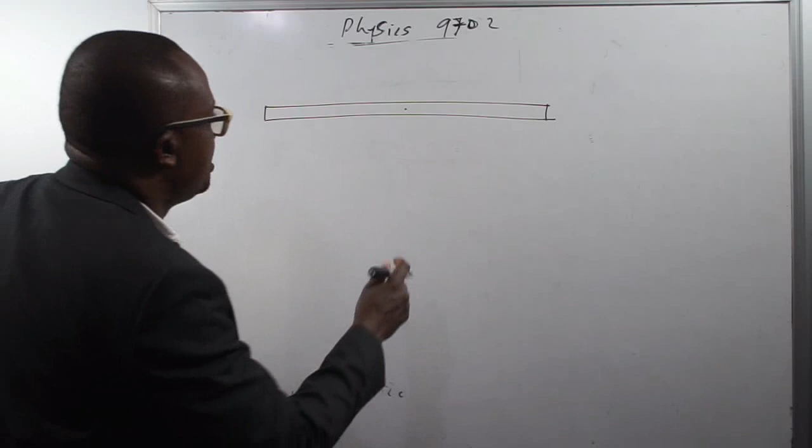So let's look at explanation on principle of moments. For example, let us say you have a uniform bar. A uniform bar means a regularly shaped bar. That implies that the center of gravity of the object will be acting at the middle, and at the middle, which is the position of the center of gravity, the weight will be acting vertically downwards.

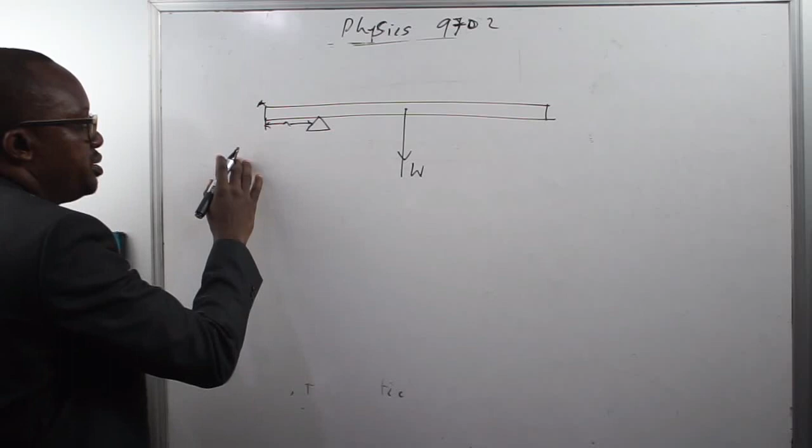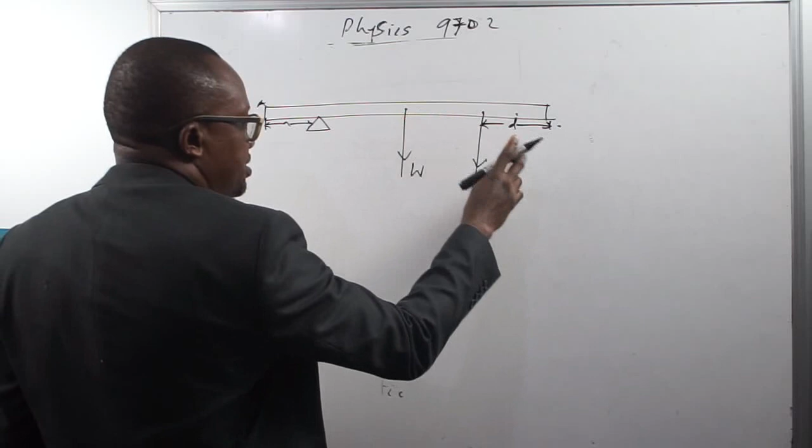So let us say that the bar is pivoted at a distance A from end A of the bar, and also we have weight F1 acting at distance D from the bar. Distance between the weight and F1, let's say it is B, while distance between the weight and the pivot is C. So let us say you have another weight of F2 at end A of the bar.

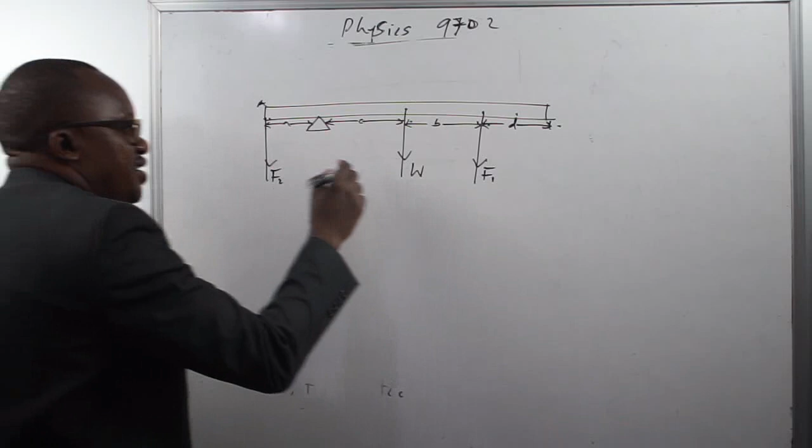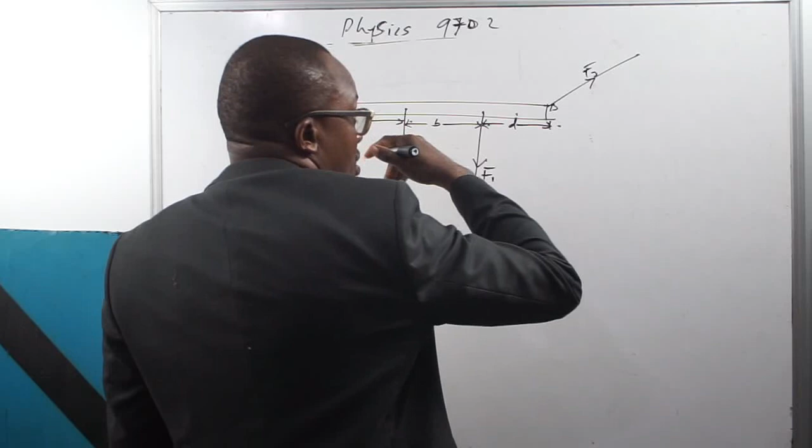While we have a force F3 suspended at end B of the bar, which is making an angle of theta to the horizontal. So let us just illustrate the principle of moment. Now A, C, B, D, they are all distances, while F2, W, F1 and F3, they are forces.

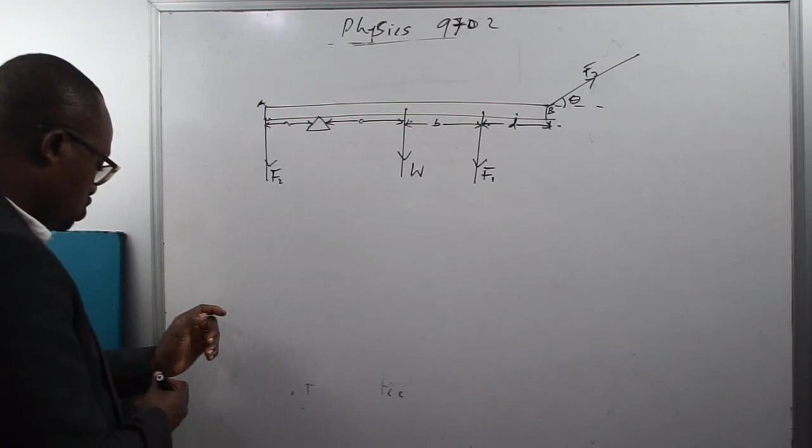So according to the principle of moment, if you take the moment about the pivot, the total clockwise moment will be balanced by the total anti-clockwise moment. So you need to state the position in which you are taking the moment about.

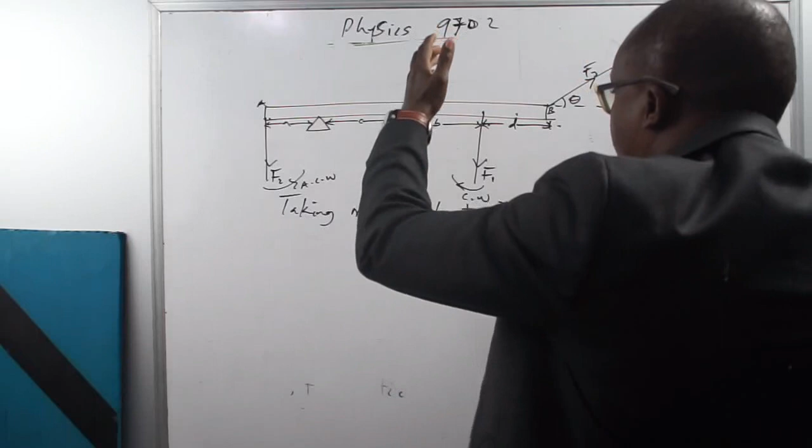So I can state this as taking moment about pivot. If I take the moment about pivot, F2 is going to cause the bar to turn anti-clockwise from the pivot. W is going to cause the bar to turn clockwise about the pivot. F1 is also going to cause the bar to turn clockwise from the pivot. F3 is an upward force, so it's going to cause the bar to turn anti-clockwise from the pivot.

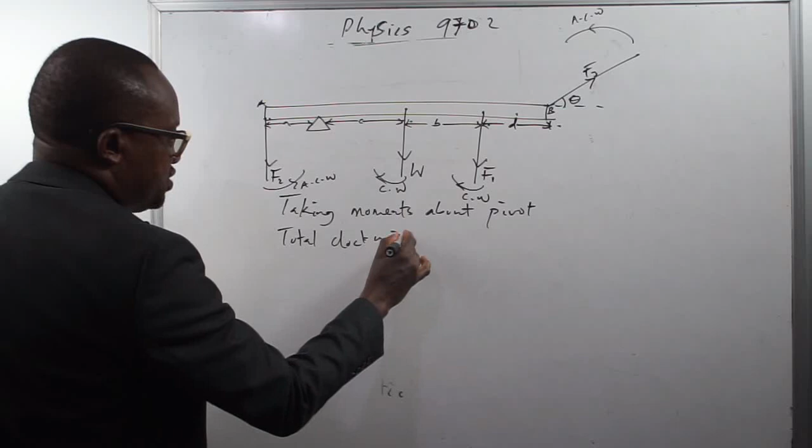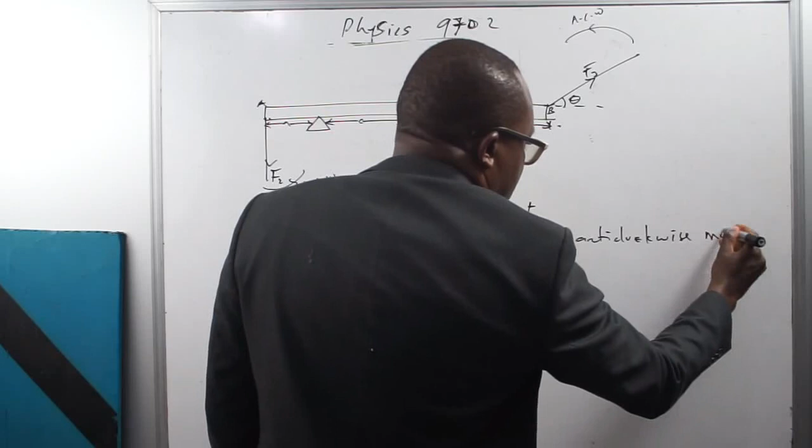So these are we have two clockwise moments and two anti-clockwise moments. So we can state it that total clockwise moments will be balanced by total anti-clockwise moments, which is the first thing there. So what are our clockwise moments? Moment, don't forget, is the product of the force and the perpendicular distance from the pivot.

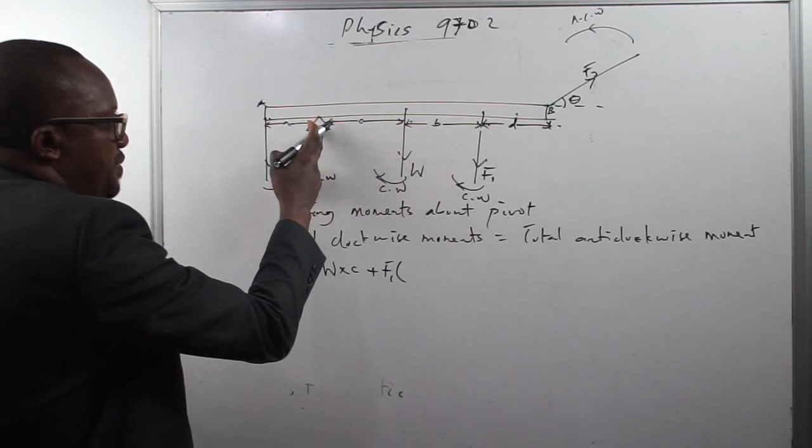So what will the moment of W be? W times C, product of the force and perpendicular distance from the pivot. The moment of F1 from this pivot will be what? F1 multiplied by the perpendicular distance from the pivot, which is C plus B.

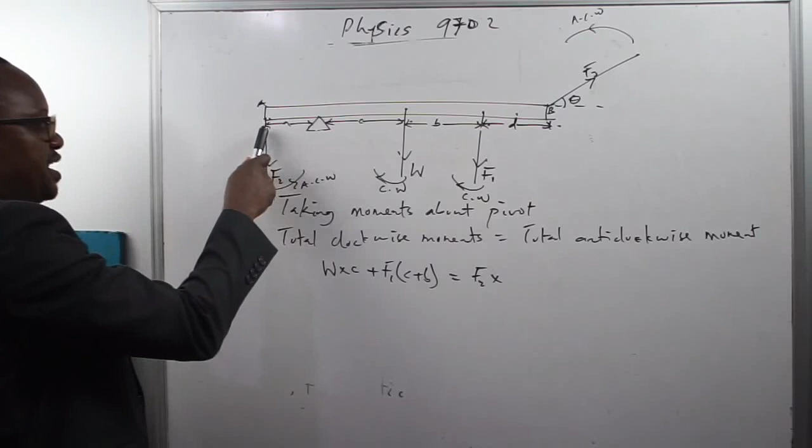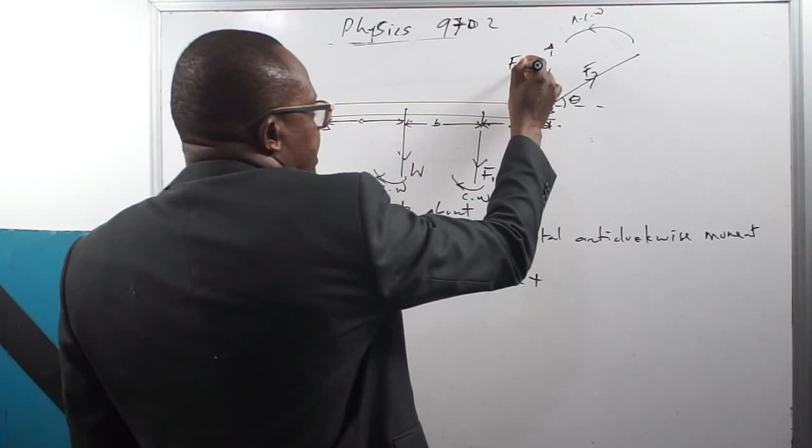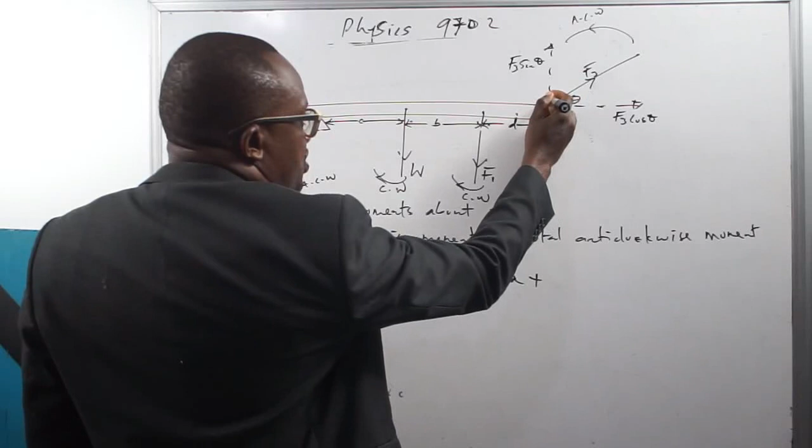This will be balanced by the total anti-clockwise moment, which is F2 multiplied by its perpendicular distance from the pivot, which is A, plus, now F3 is a two-dimensional force. The vertical component of F3 is F3 sin theta, while its horizontal component is F3 cos theta. It is the component of the force whose line of action is acting perpendicularly to the pivot, to the distance from the pivot, that will produce a turning effect.

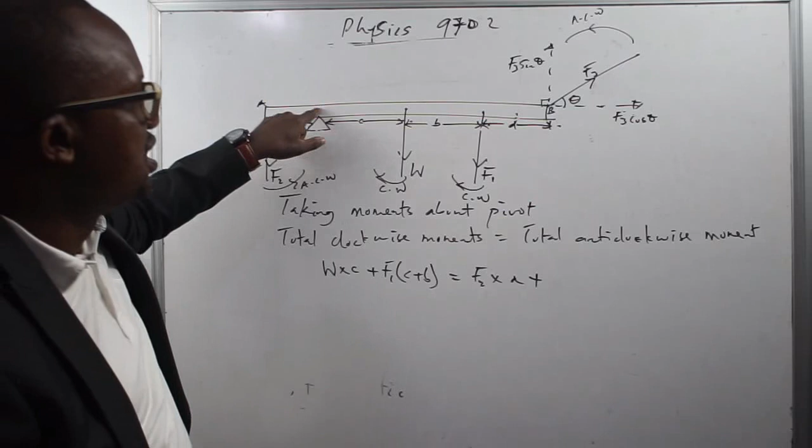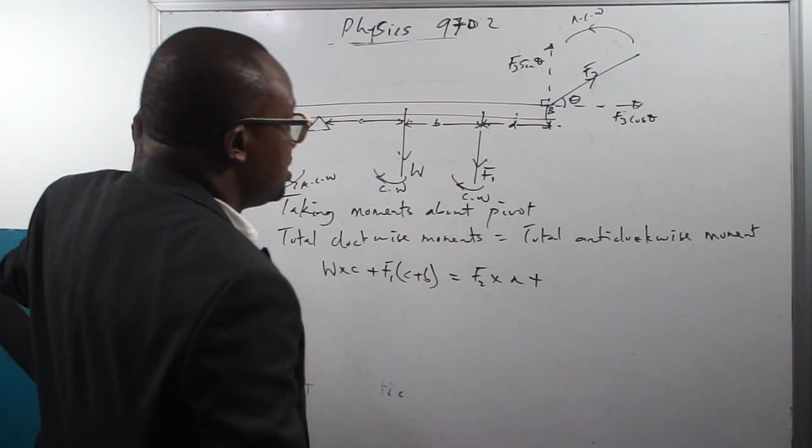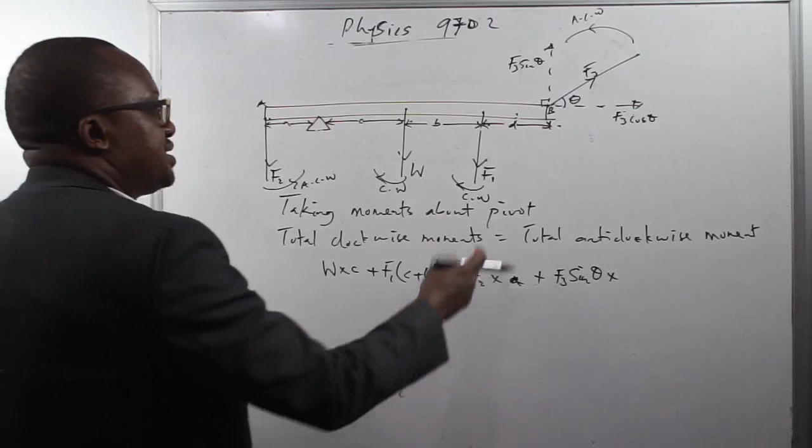F3 cos theta is acting in a direction that is parallel to the distance from the pivot. Therefore, the moment about the pivot is zero. So this is the only force, the component of F3 that will produce the moment about the pivot. So I'm going to write plus F3 sin theta multiplied by the perpendicular distance of F3 sin theta from the pivot, which is what? C plus B plus D.

So that is just a simple expression on how to take the moment of all the forces about the point. And when you take the moment of all the forces about the point, you can use that to determine either force or distance. Because in solving a problem, if you have a linear equation, that linear equation can only solve one unknown. So sometimes you'll be solving for force, some other times you'll be solving for distances, as the case may be. But what is important is that you should know how to apply.

What do you understand by the center of gravity? It is the point where the weight of an object acts. If the object is regularly shaped, the center of gravity will be at the middle. We have explained that earlier on. Then the principle of moment states the algebraic sum of the clockwise moment and anti-clockwise moment taken about the same point is equal to 0. What that means is that the total clockwise moment is equal to the total anti-clockwise moment about the same point.

Moment is a vector quantity, it has direction. So you need to identify what forces are producing clockwise moment and what forces are producing anti-clockwise moment about the same point, which is the pivot. After you've done that, you can set the total clockwise moment, which is the product of each of those forces and their perpendicular distance from the pivot, to be balanced by the total anti-clockwise moment, the product of each of those forces and their perpendicular distance from the pivot.

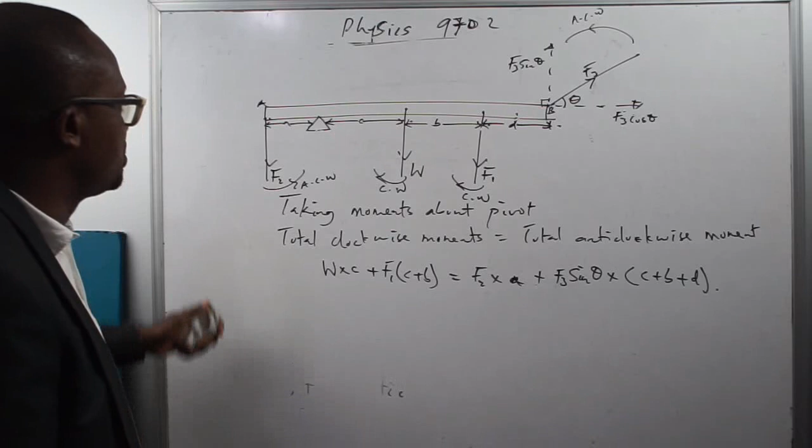So having said that, let us take some questions now on the principle of moment. Let us quickly take some questions on the principle of moment. And the first question we'll be looking at is this.

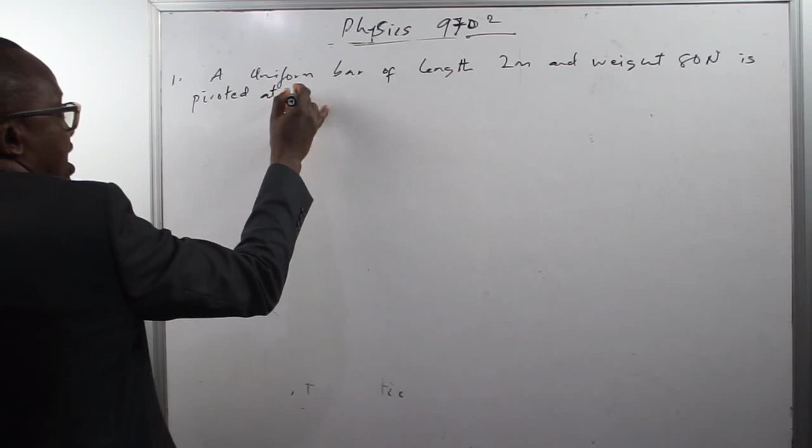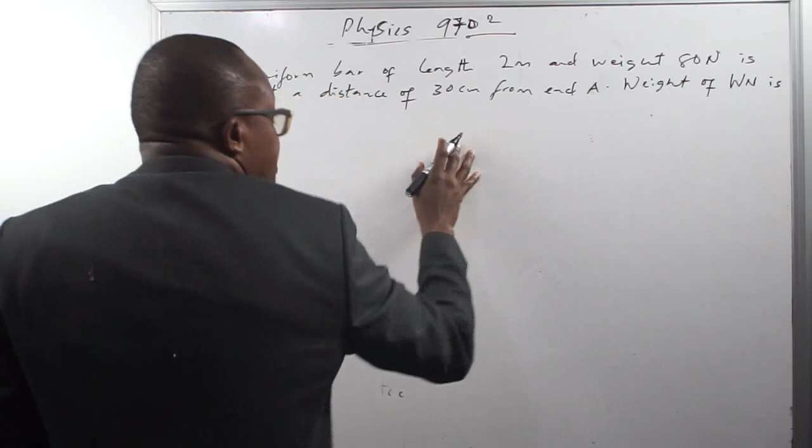A uniform bar of length 2 meters and weight 80 newtons is pivoted at a distance of 30 centimeters from A. A weight of W newtons is suspended at the 50 cm mark from A.

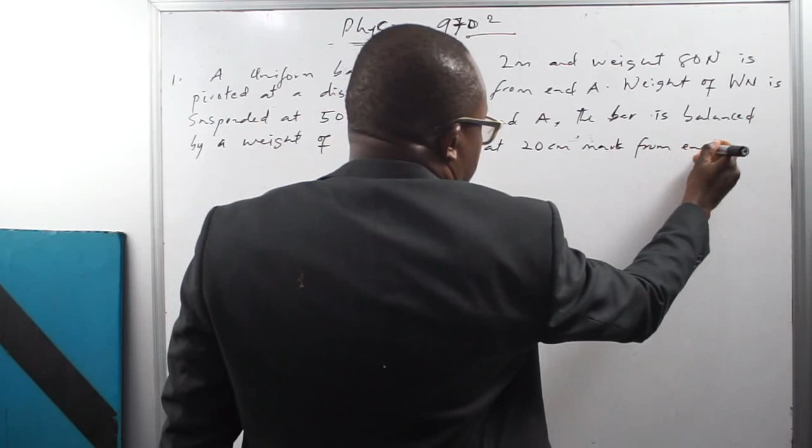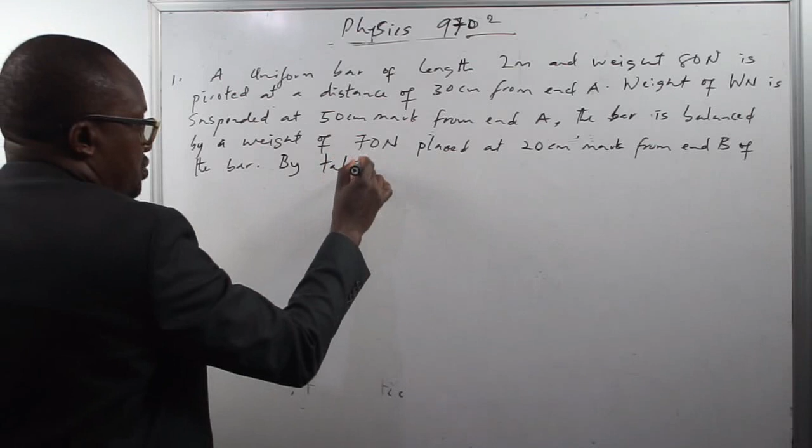The bar is balanced by a weight of 70 newtons placed at the 20 cm mark from B of the bar. By taking moments about the pivot, find W.

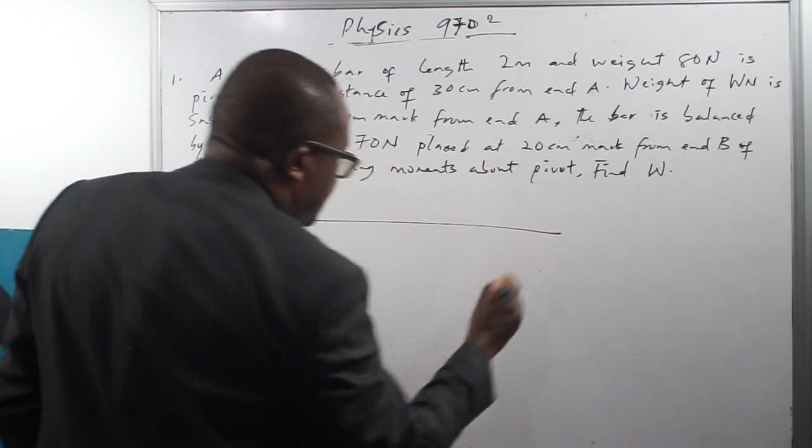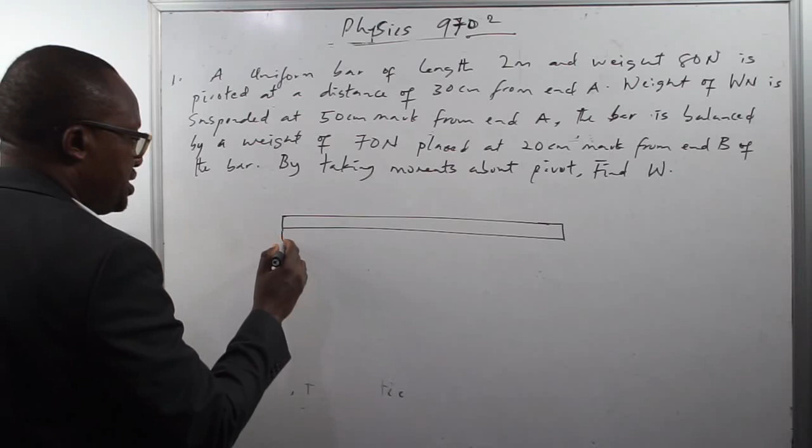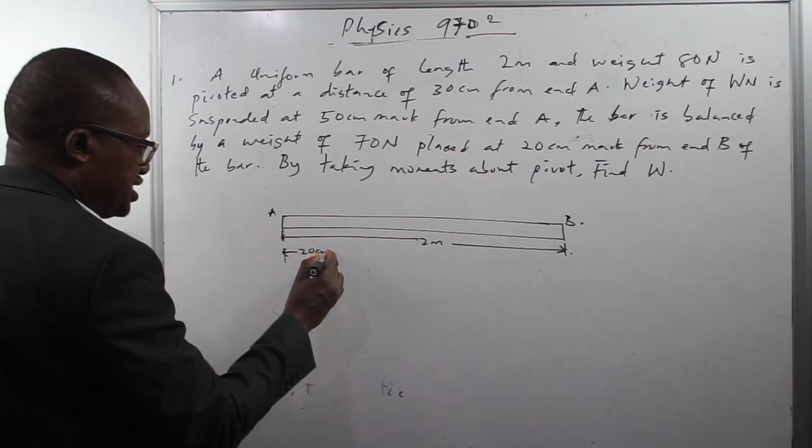So the diagram is this. We are told that the length of the uniform bar is 2 meters. You have A and B. It is pivoted at a distance of 30 centimeters from A, so this is where you have the pivot. The weight W is placed 50 centimeters from A. It is then balanced by placing a weight of 70 newtons.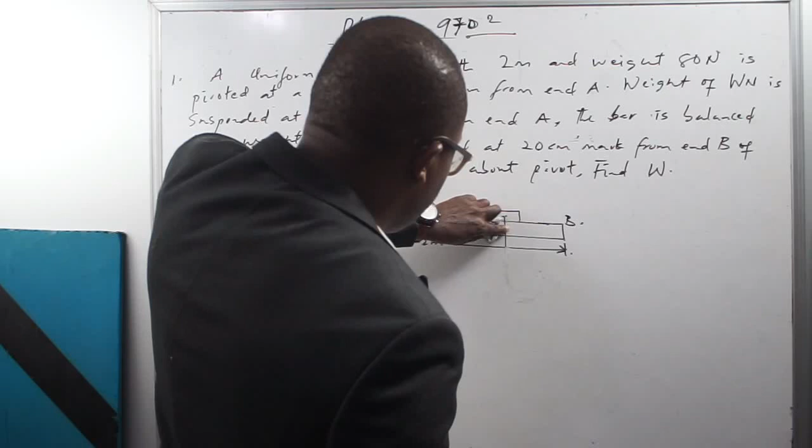Remember, look at the way I'm drawing the direction of the line of action of the weight. Let me reverse this quickly, I want to illustrate something. Even if you are told this is just 70 newtons and they did not draw the line of action of the weight, you know weight is a downward force, it acts vertically downwards. It's very important. Whenever you have a force, it is a vector quantity, it will have both magnitude and direction.

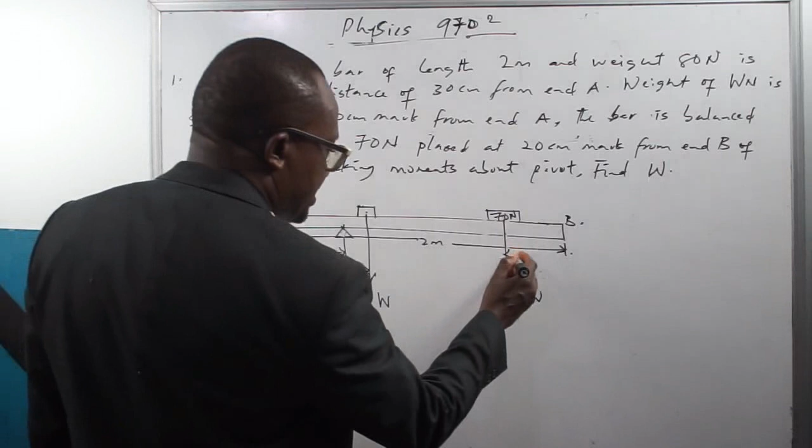So we have represented the weight that is placed 30 centimeters from A. We have also represented the weight, 70 newtons, placed 20 centimeters from B. Has the weight of the bar itself been represented? Because a uniform bar of length 2 meters and weight 80 newtons, the weight of the uniform bar will be acting where? At the middle, and it will be acting vertically downwards. So the weight of the uniform bar is 80 newtons.

The weight of the uniform bar there is 80 newtons. Sorry, please, I need to quickly correct something. A uniform bar of length 2 meters and weight 80 newtons is pivoted at 50 cm from A, where W newtons is placed at 30 cm.

So the length of the uniform bar is 2 meters. It is pivoted 50 cm from A. The pivot is located 50 cm from A. Then we are told that a weight of W newtons is suspended 30 centimeters, and a weight of 70 newtons is suspended. The weight of W newtons is suspended 30 centimeters from A. Remember what I've said, weight is a vector quantity, so this weight acts vertically downwards.

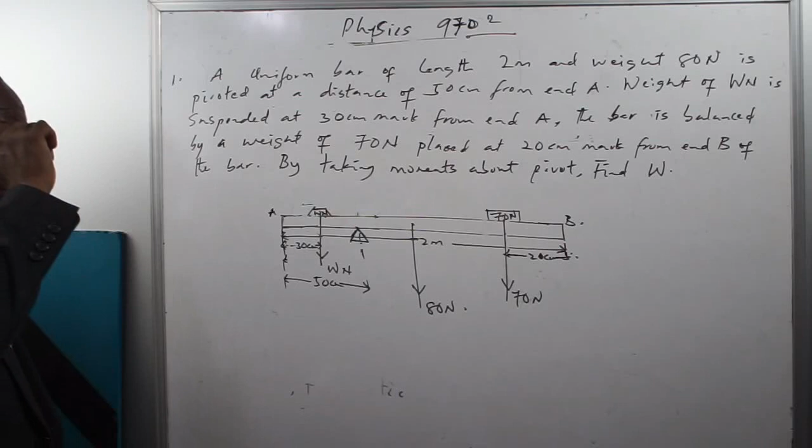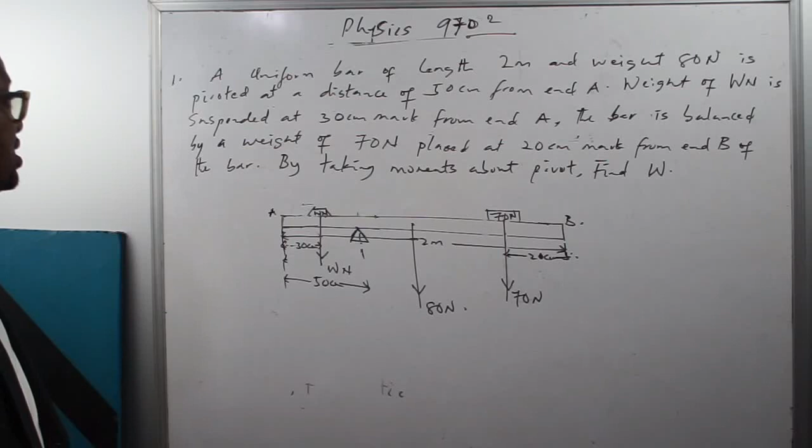We go over the question again. A uniform bar of length 2 meters and weight 80 newtons is pivoted at a distance of 50 centimeters from A. So 50 centimeters from A, you have the pivot. Weight W newtons is suspended at 30 centimeters from A.

The bar is balanced by a weight of 70 newtons placed at 20 centimeters mark from end B. By taking moment about the pivot, find W.

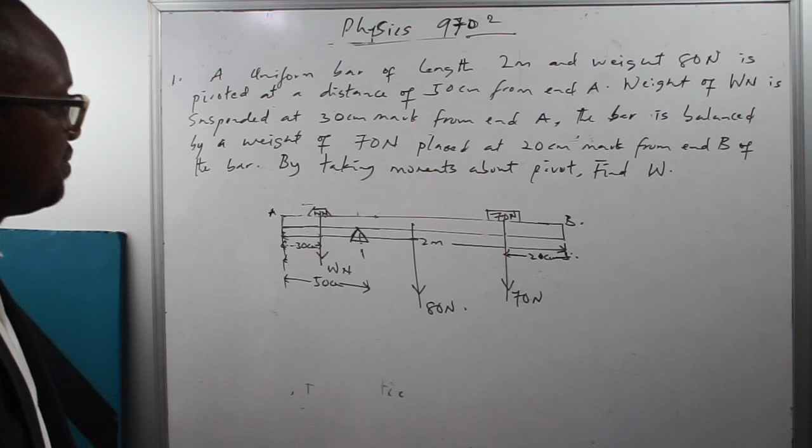So we are representing all the forces. W newtons is 30 centimeters from end A. The pivot is 50 centimeters from end A. 70 newtons weight is 20 centimeters from end B.

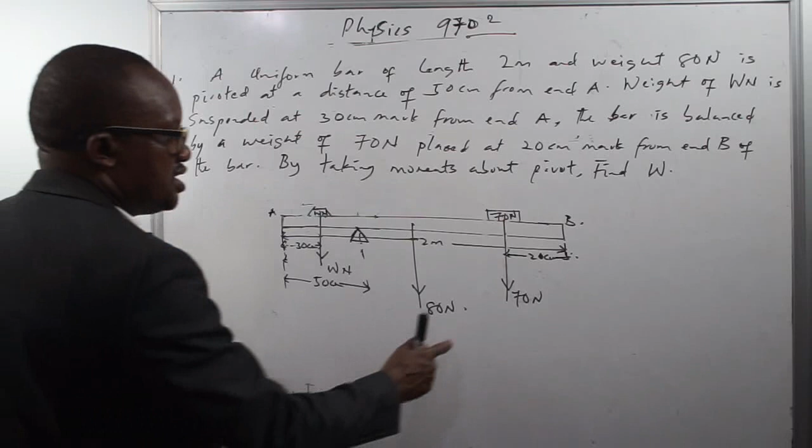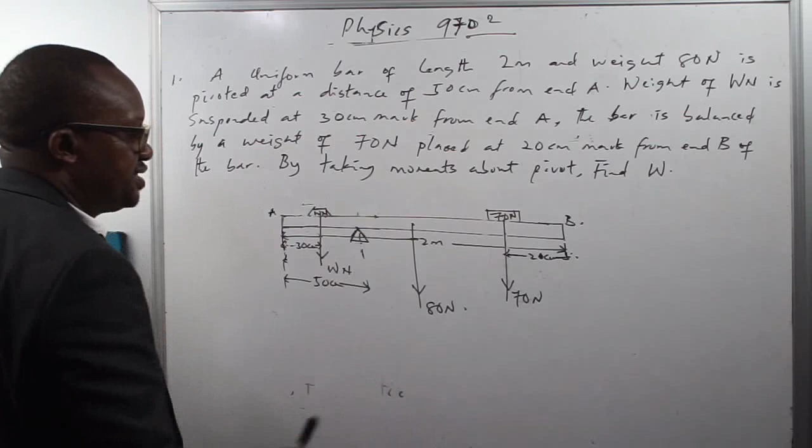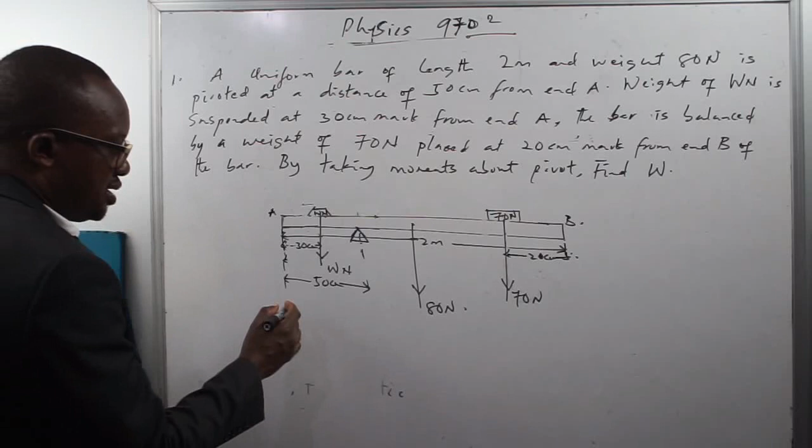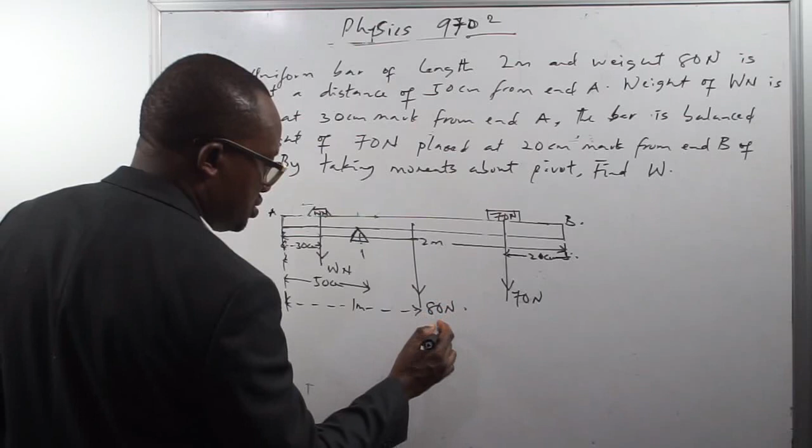The weight of the bar itself is a uniform bar, meaning that it has a regular shape, and the weight will be acting at the center of gravity. Center of gravity will be at the middle, that's where the weight of the bar itself is acting vertically downward. So we should know that the distance from here to where will be 1 meter, while this distance also is another 1 meter.

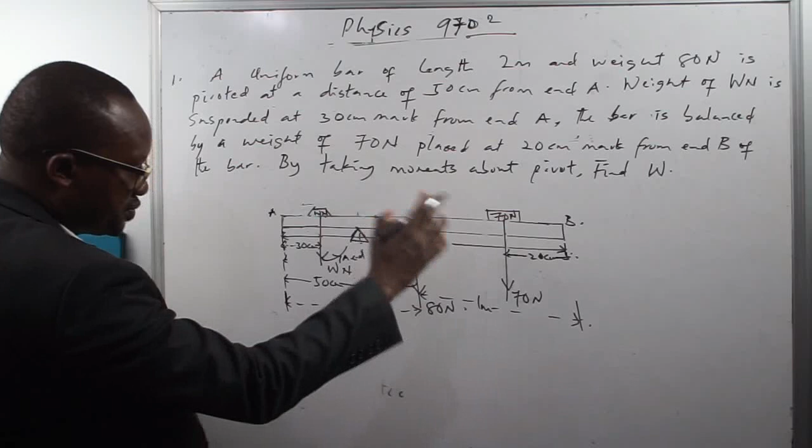So taking the moment about the pivot, we have this. This weight is going to cause the bar to turn anti-clockwise from the pivot. This one will cause the bar to turn clockwise from the pivot. This also goes to cause the bar to turn clockwise from the pivot.

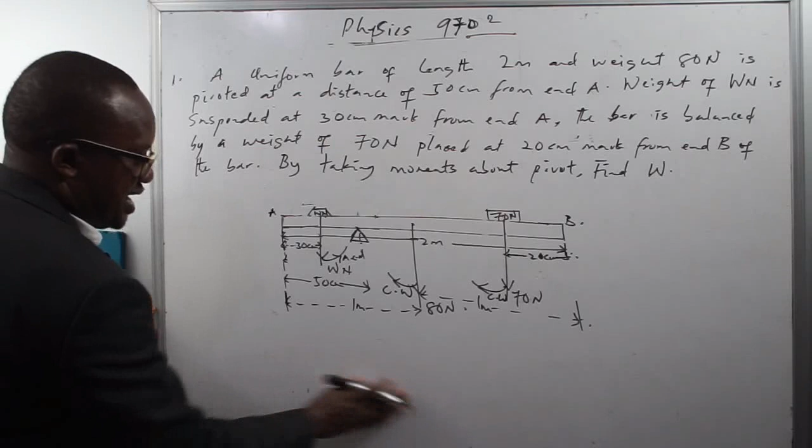So we can now write down on there that taking moments about pivot, we have our clockwise moments must be balanced by the what? Anti-clockwise moments.

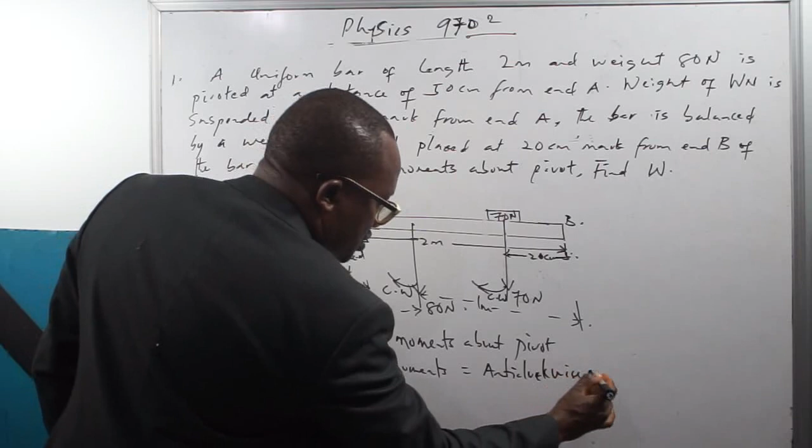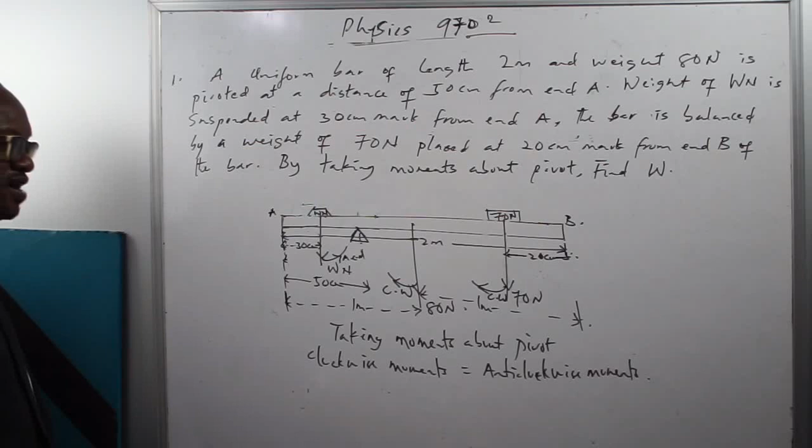What are the clockwise moments? Remember that moment is the product of the force and the perpendicular distance from the pivot. So we need to know the distance of this force from the pivot. It's acting at 1 meter. Distance from end A to the pivot is 50 centimeters. So distance from the pivot to 80 Newtons will also be 50 centimeters.

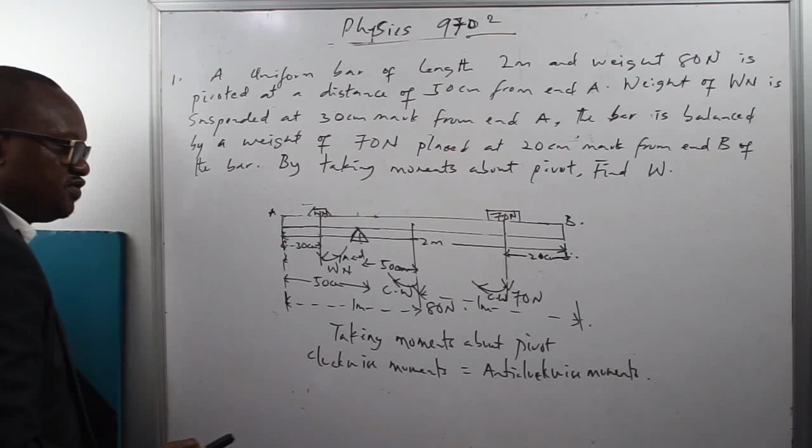Next, distance of this clockwise moment from the pivot is what? Distance from here to here is 50 centimeters. Distance from here to here is 20 centimeters. That means distance from here to here will be what? 200 centimeters, which is 2 meters, minus 70 centimeters. That is going to give you 130 centimeters.

So the distance of the 70 from the pivot is 130 centimeters. Because by the time you add everything, I add from here to here is 50, from here to here 130, 20.

We've done that. Then the last one, anti-clockwise moment, which is the moment produced by the W Newton's force, is acting at what distance from the pivot? 20 centimeters. Because from here to here is 50, from here to here is 30, from here to here is 20.

Once you are able to identify the distance of that force from the pivot, then you can take the moment about the pivot. That's why the distance from the pivot can either be to the left or to the right. That's why you have some moments are clockwise. So the clockwise moment is always, distance is always going in negative x. That's why clockwise moment is taken to be negative moment. While anti-clockwise moment, distance is always going to the positive length. Is taken to be the what?

Positive moment. But also, that's why we said that algebraic sum of the clockwise and anti-clockwise is equal to 0, which means that the clockwise will be equal to the anti-clockwise moment. So you have to take your distance from the pivot in any given direction. And you look at the direction of the turning force of the moment.

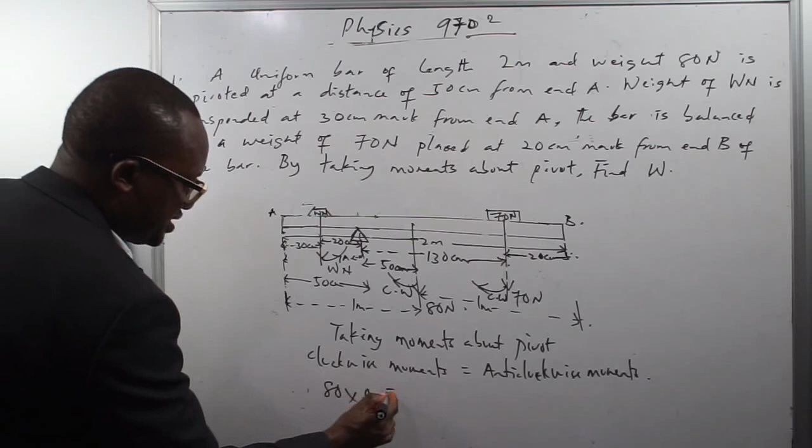So the clockwise moment will be, first one is 80 multiplied by 0.5 meters plus 70 multiplied by 1.3 meters is equal to W multiplied by 0.2 meters. I can as well have left the distance in centimeters because I'm not solving for distance, so centimeters is on both sides if you cancel out. But it's good that I put them in meters.

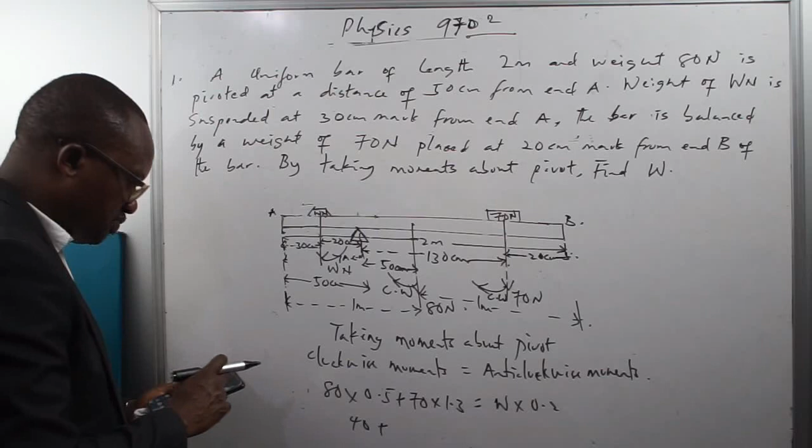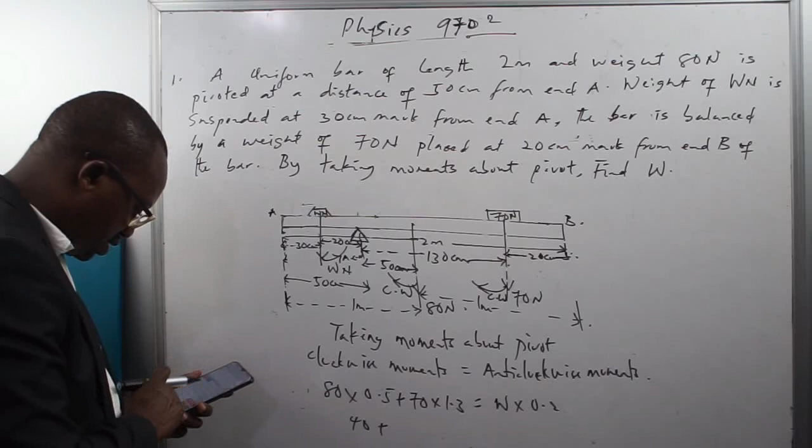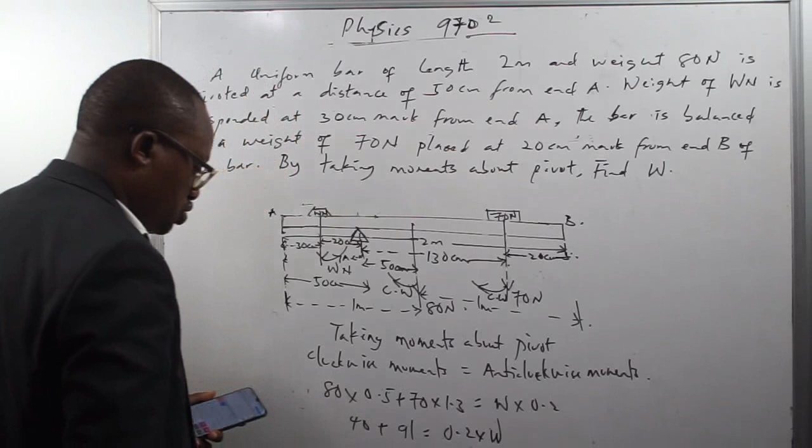80 times 0.5 will give you 40 plus 70 times 1.3. You do that quickly. 70 times 1.3 will give you 91 is equal to 0.2 times W. So 40 plus 91 is equal to, of course you should know that is 131 is equal to 0.2 W.

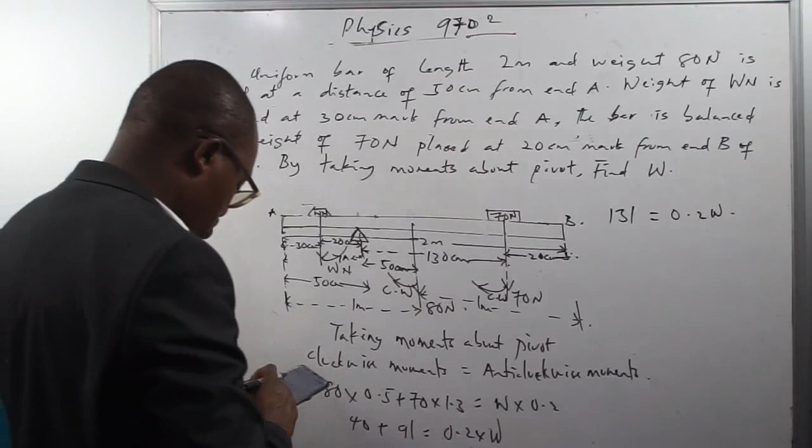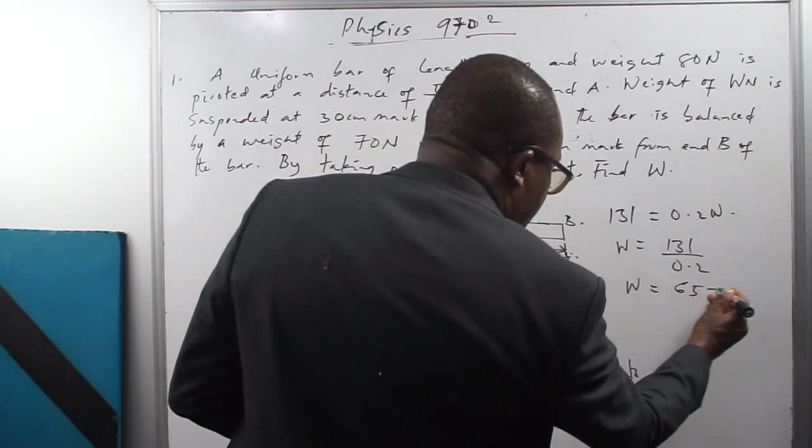So W will now therefore be what? 131 over 0.2, which is equal to, so that will give you 655 newtons.

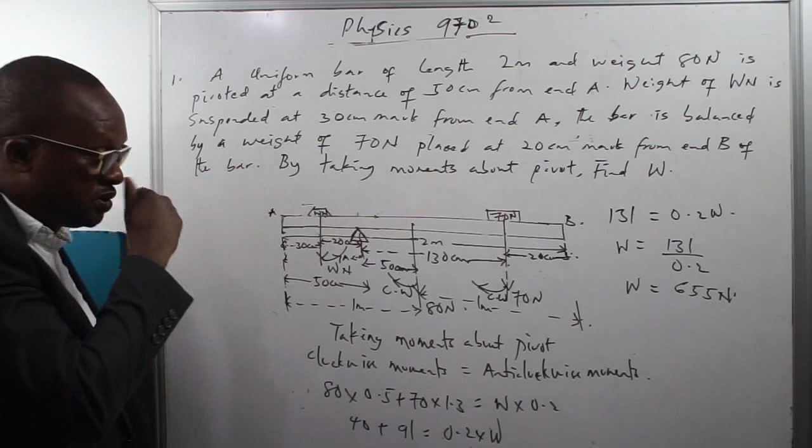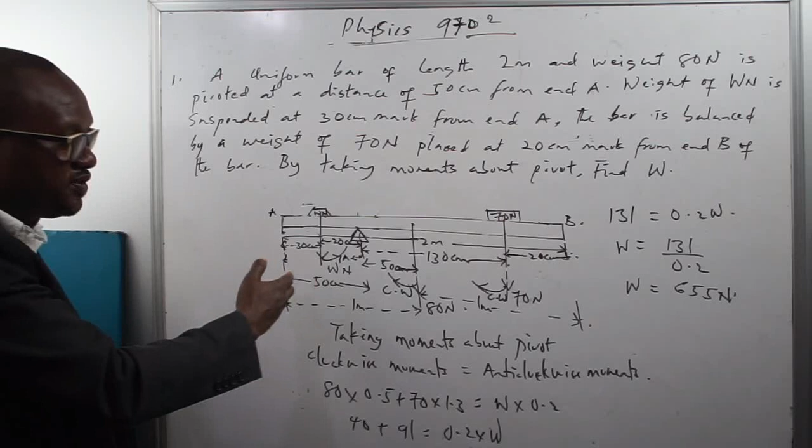So that's it. So look at the basic principle that I've used there. Number one is that we identify the position of the weight of the object is at the middle. We identify the clockwise and anti-clockwise moments. We identify their distance from the pivot, and we took the moment of all the force about the pivot to solve for the unknown. All right.